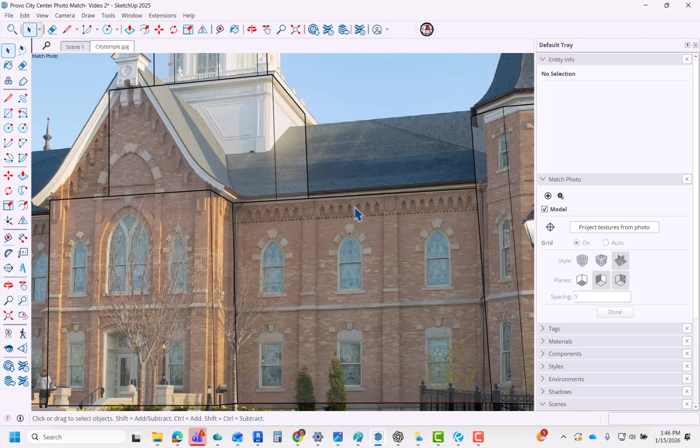The first thing I might do is look at this cornice at the top of the wall, and I'll use T for tape measure, and then I'll just pull something down, and then I've blocked it out. That's all I've really done. I can see where it's supposed to go. Okay, and then I'll move on to these pilasters. And remember that I'm putting this guide outside of the component or group.

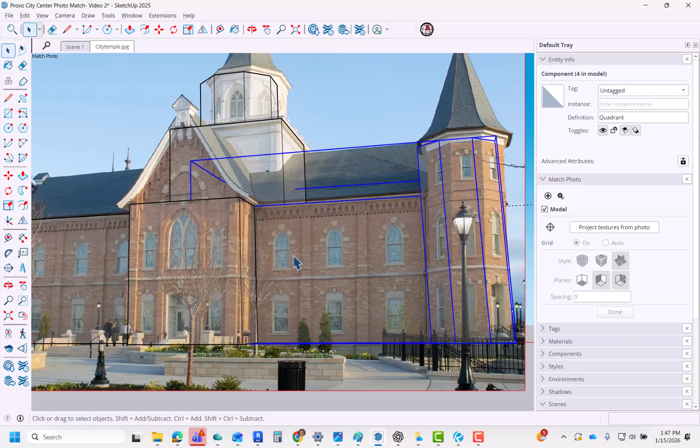And I got to keep reminding you, if you're not using components or groups, then you solemnly swear that you are up to no good. You are making life so hard down the road, and it's got to be grouped. It's got to be componentized. Don't know if that's a word, but I use it all the time.

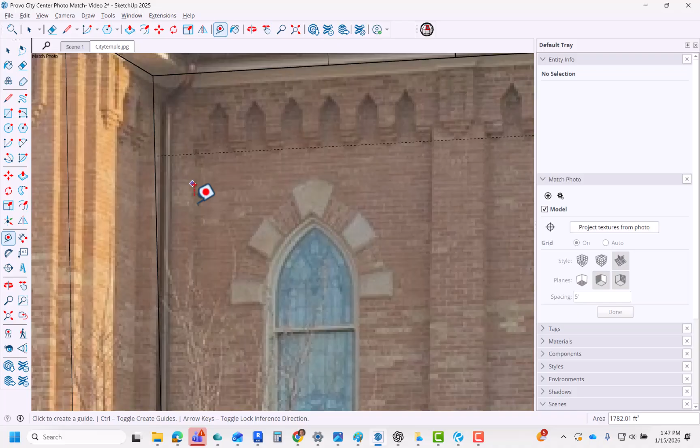Okay, now to do the rest of these, again, I'm drawing on the outside of the component, and I'm going to do T for tape measure. I just want to know, how wide is this thing? It's about 2 foot 2 right there. Okay, perfect. And I can tell, it's hard to see in this image, but there is a half pilaster here in the corner, and then a full, and then a full, and then there's a half pilaster over here.

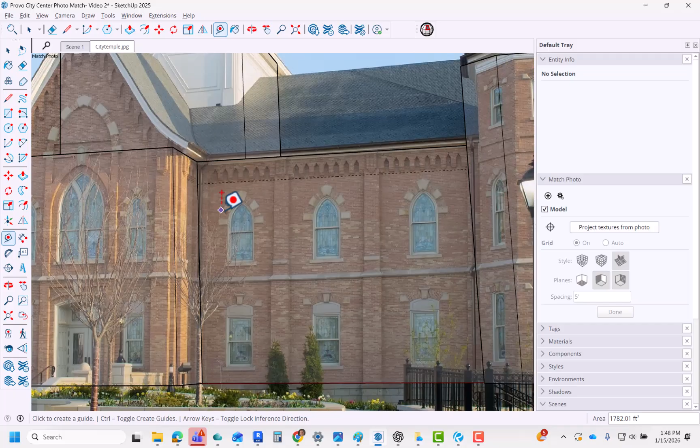And instead of following the image, I know this is symmetrical, or at least it appears to be. So I'm trying to ignore the image and just use math and division to make sure that the pilasters are spaced out equally. And I have a quick trick that I use for that. So try to follow this as best you can. It's a little bit confusing the first time. Maybe rewind and watch if you don't get it the first time. But what I like to do is group all the pilasters together like this.

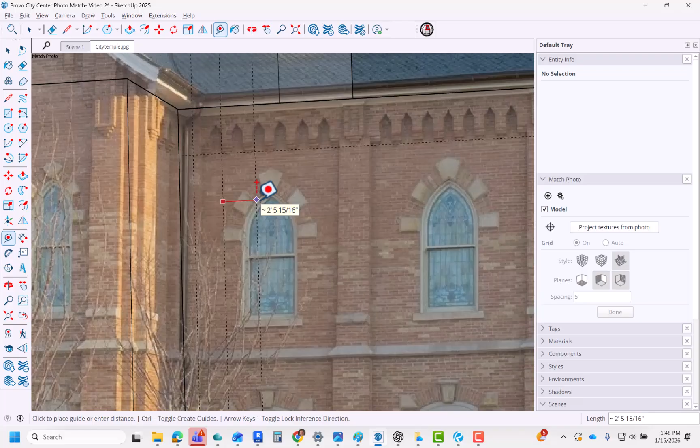I'm going to come over here and I'm going to say the first one is half, so half the regular size, so that would be 1 foot 1. And then the next one is 2 foot 2. Okay, so that little block out refers to the width of this pilaster. And then I'm going to do one more, and this is going to be 2 foot 2. And then I'm going to do one more for the half pilaster over here.

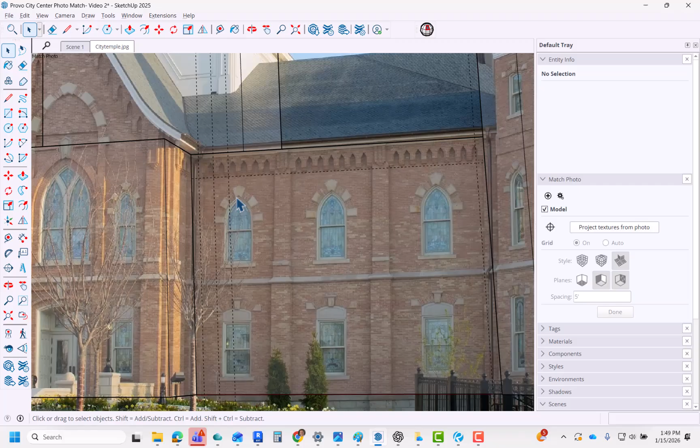And in fact, it might even be easier if, for the last one, I'll just put it over here on this side where it's supposed to go. So that's 1 foot 1 for that one. Okay, and what I've just done is I've given myself the space that's left over. If you were to take this full wall and subtract a half pilaster, a full pilaster, and another half pilaster, how much space would you be left with? Well, it would go from here over to here. I'll draw a line. This is the space you'd be left with.

And make sure you're always in axis. You can push Shift if you need to constrain it to an axis. But that distance right there, if I were to divide that by 3, that would tell me the distance from this edge, half pilaster, to this edge, full pilaster. Okay, I'll explain that one more time. What I did is I grouped all my pilasters with their proper measurements, and then I saw the remaining distance that would exist along this wall from that corner to that corner.

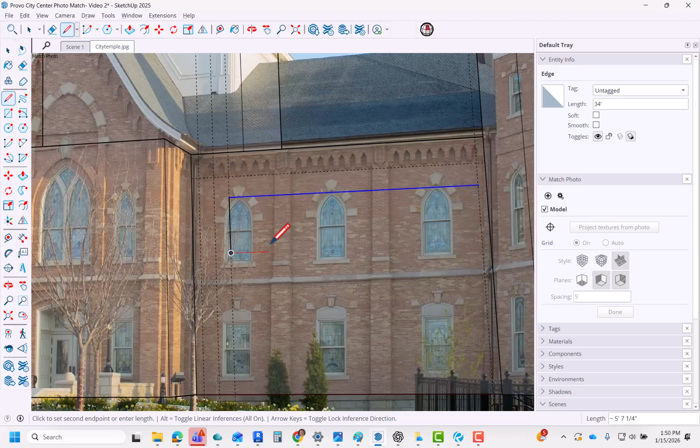If you subtract out the pilasters, this is what you're left with. And in my case, I just divide that space by 3. Okay, now how do I do that? Well, if I just draw myself a little line right here, and then select the line, and I'm going to use the array tool, so M for move after I select it, push Control so you get the little plus symbol, and I'm going to move that from one side to the other, which is next to this pilaster.

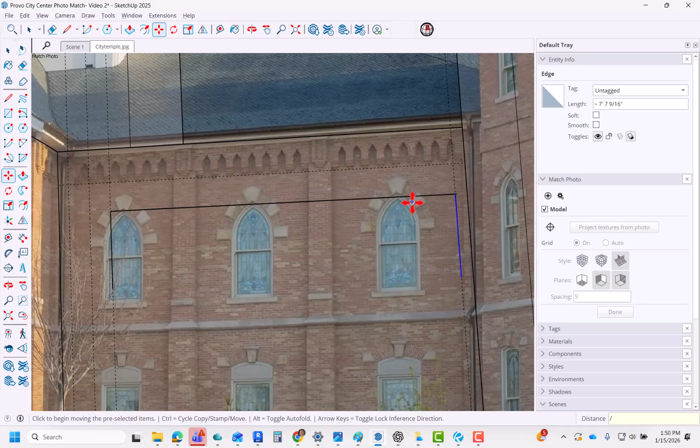And it looks like I'm just off a little bit. I don't want to go to the end of that line. I want to go to where it hits the pilaster, which would be right there. And then I'm going to push divide on my keyboard, and then the number 3. And there you have it. Those are the actual distances if everything is equally spaced for these bays in between their pilasters. There's one. Here's another one. And here would be the third from here to here.

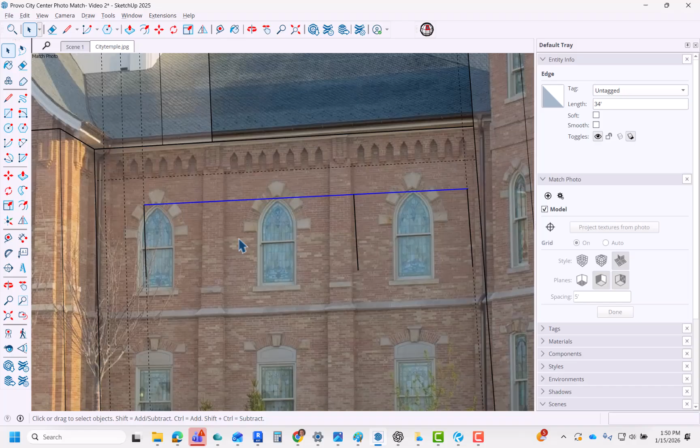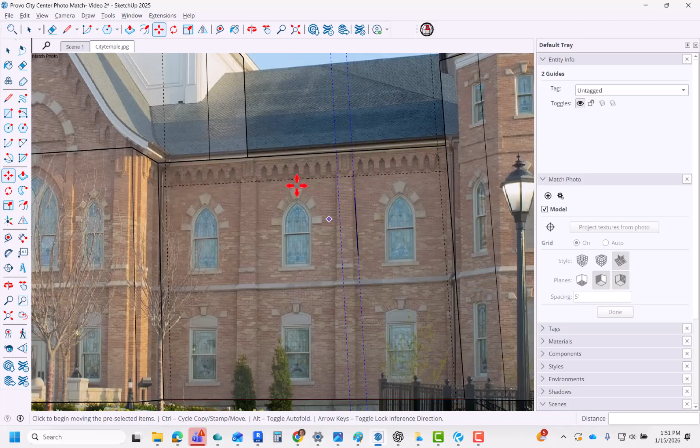Okay, so with that in mind, I don't need most of this anymore. All I really need is this line right there. I don't really even need this one. Okay, so now I can take this guide, and I'm going to move it. Actually, I'm going to move 2 of them, right? I'm going to move both of these because that will show me where my pilaster ought to be. And it's not in line with the picture really at all. But I think that using math here is more important than alignment with my picture, because I know that these things should be equally spaced.

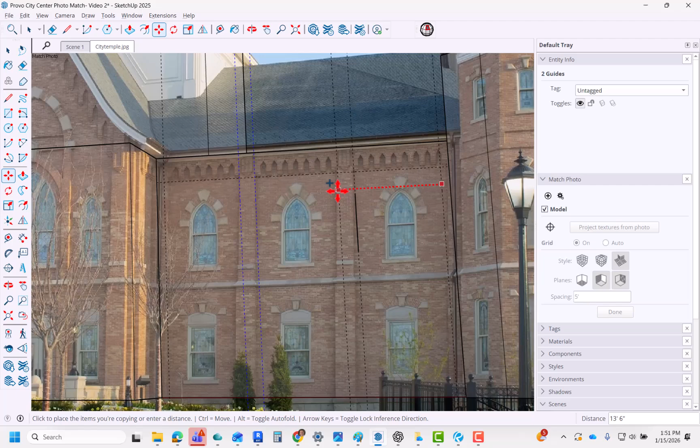Okay, and then I can take these two guides, and I'm going to push M for move, and then Control for copy, and I'm just going to take the right-hand side so that I copy that distance over again. Okay, make sure you're in axis. I'm going to hold down Shift with the red showing. There it is. And now look what I have. Now I'm left with half pilaster space, or bay, pilaster bay, pilaster bay, half pilaster. This is awesome. There's no geometry here yet, but I'll know exactly what to do when I get there.

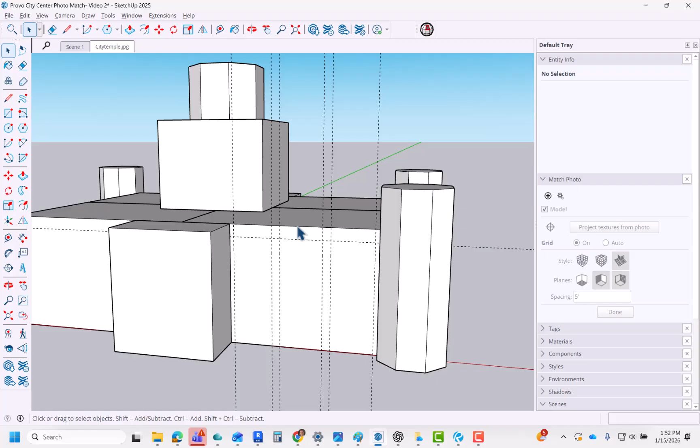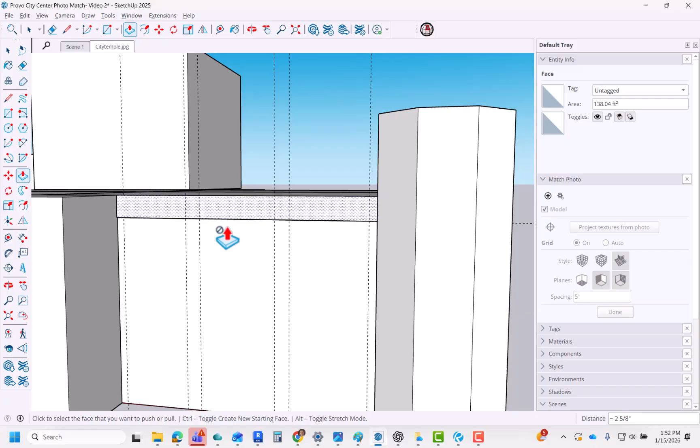So in fact, I should probably do this inside of my component. And I guess you wouldn't have to. This is a little bit tricky here, knowing what to do. Here, let's play it safe. I'll go outside the component, and I will start by drawing this first piece. And I'm going to push-pull that. Let's try that again. And I'll use my image again just to see, how far should I pull this thing out? And that's tricky because there isn't really an edge that I can align this to. So I just got to guess it.

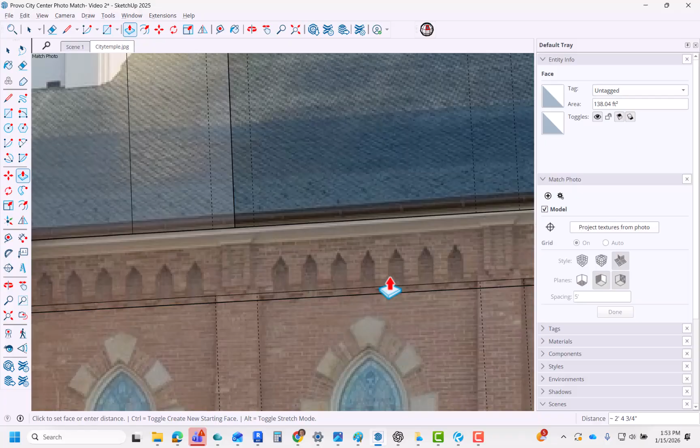And I'm looking down here to see how far it sticks out. And I would imagine that's like 10 inches to a foot. Maybe I'll just go 10 inches and let's see. Okay, good enough for now. Okay, and then to be safe, let's just make that a group. Oh, look, there was a line left over here. I got to delete that out. Okay, now I triple click this, and I'm going to make it a group. Okay, now my pilaster.

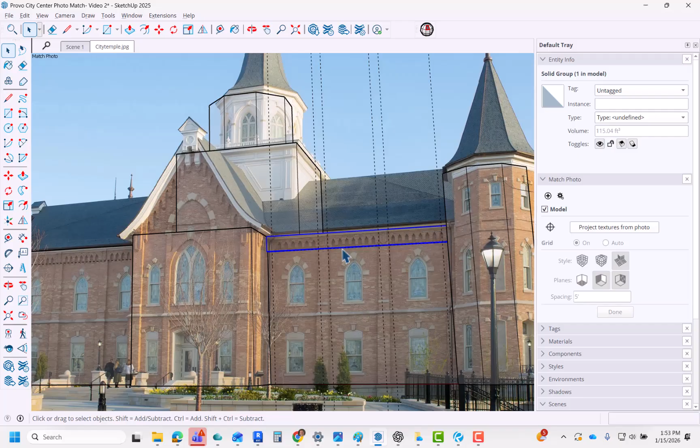You know what? On second thought, let's go ahead and make this a component. Make component. I don't need to name every one of them. Some are important, and this one's just not. Okay, now I got a component. And now I'm going to go ahead and do the same thing for my first pilaster. And I'm building it on the outside of the wall.